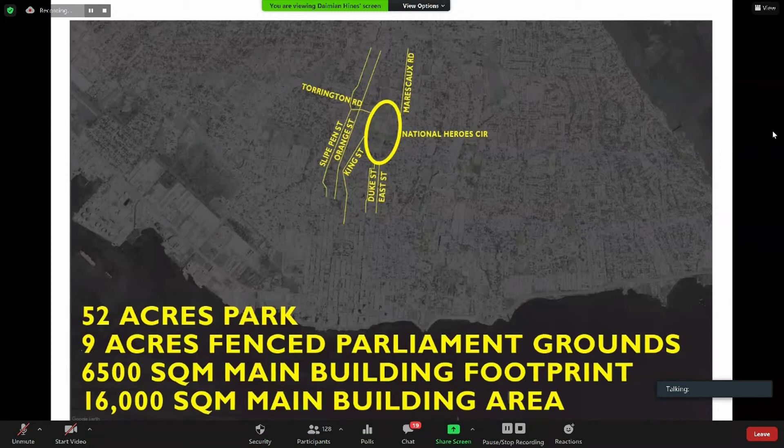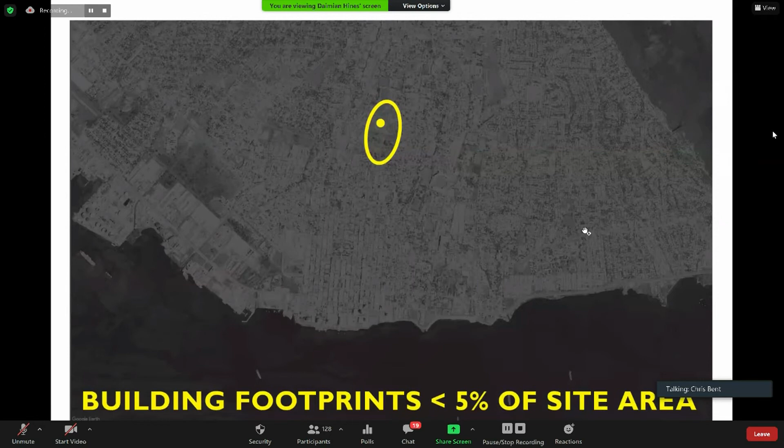If we could go to the next slide, Damien. And that's just to give you a graphic scale between the overall park, 52 acres, and the actual building, the Parliament building.

So as we said, it's about 85% open public park that we're creating. It's already there, we're not creating it, but we're going to enhance it, and we're going to try to demonstrate how we can make it even more accessible to the public than it is currently.

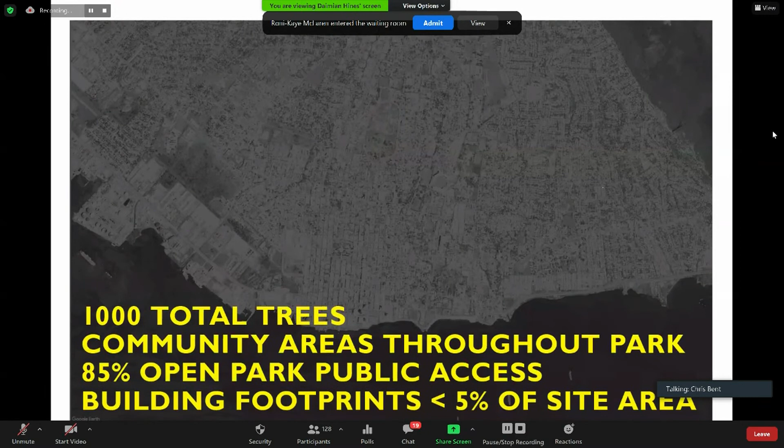Next slide, please. The overall, just to give you an idea of what it is that we're doing, and we'll go into it in more detail, is that we're looking at adding about 1,000 more trees to the site. We're going to be making sure that we use plants and trees that are readily available and endemic to Jamaica.

We're making sure that we are putting in a series of defined walkways and trails throughout the site, which will help to frame different activities throughout the park. We've looked at the improvement of infrastructure strategies around the park, how we manage water to irrigate the site, as well as how we're going to manage and control stormwater running off of the site.

We'll get into that in a bit more detail when Environmental Solutions presents the EIA. We're talking about a barrier-free park, which means it's not only open to anybody in the public, but it's also very accessible for anyone who has any form of disability, anywhere in that park. Anyone with any disability will be able to go and enjoy any area within the park.

We're adding a lot of amenities, and we're going to show you some of them, most of them, that we have in the park. But obviously there are some existing features in the park which we have respected, and we're going to enhance those. Areas like the shrine and the Patriot's Circle, we're going to make sure those are enshrined, properly addressed and detailed, and hopefully they will attract more public interest than currently exists.

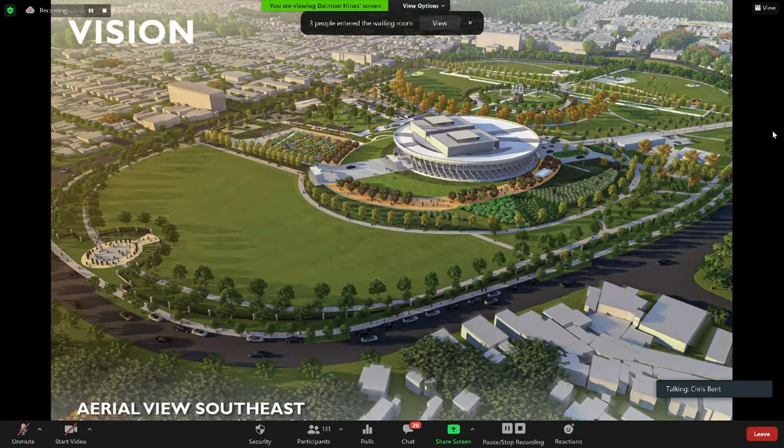So this is a quick overview of what Heroes Park is going to be transformed into. Just to give you your orientation, the area on the left-hand side of the screen is the northern end where Wolmer's Boys is, the entry to Wolmer's Boys. On the side where you have the word vision, that's where Allman Town is, and that building there that's been circled is the Ministry of Finance.

On the southern end, on the far end, that's where we come up Duke Street, and just to the left of that we have the Ministry of Education. The shrine area is right in the background there, where the existing shrine with all the heroes is, where all the heroes are buried. So that just gives you an overview of the orientation of the site.

So there are things that, when we first joined in the process of moving forward from the competition, we started off with having several public meetings and workshops. We've met with various stakeholders, local community, statutory authorities, various government groups, National Heritage Trust, security including the police, the JDF, and aviation authorities. We also met with environmental agencies, and we looked at the traffic study as well. So all of that fed into the solutions that we're showing you.

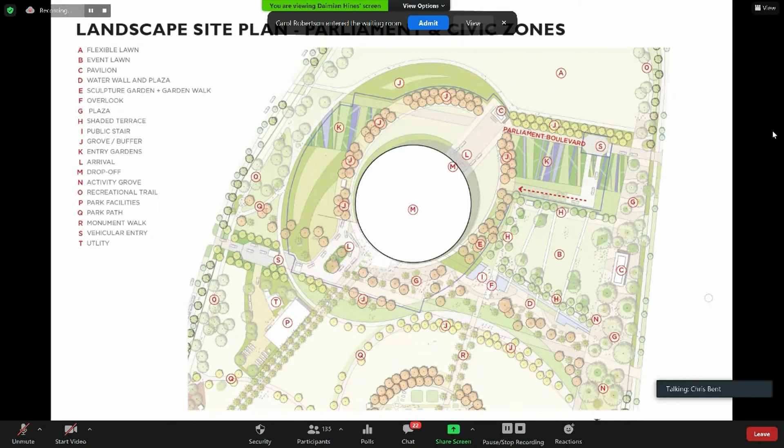So all of those things played into what we came up with in this design. We wanted to build on those concepts: the symbol of national pride, an icon of our people and our democracy, and most importantly, a place for people, the people's park. It's a place for everyone to use and enjoy, a place which truly represents not only the surrounding communities, but also all people of this nation. As our motto states, out of many, one people.

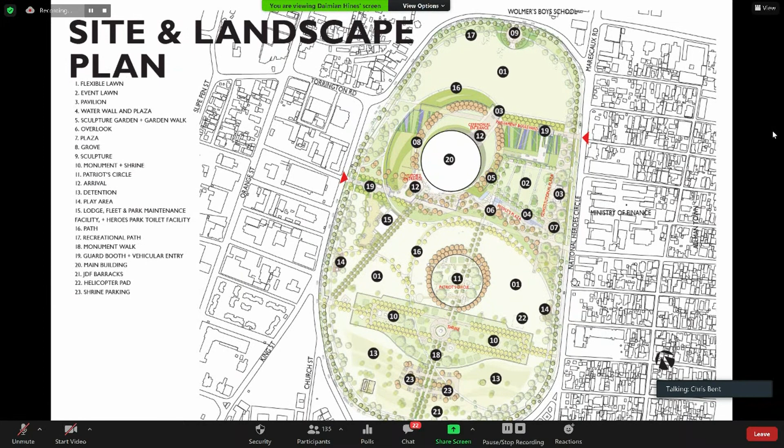The planning of the park was, as I mentioned, completely open and accessible. We looked at basically four or five different sections, starting off at the southern end. We have the existing shrine with all the heroes, and we enhanced that area for the kind of events and ceremonies that they have there.

When we were meeting with the JDF, who has overall care for this area, they were saying that a lot of locals didn't realize that this place is open to anyone at any time. It's an enclosed space, and they were encouraging us to try to open it up so that people could realize that you can go there and pay your respect at any time of the day or any time of the year.

So we took that into consideration. For the existing wall, we tried to create new openings, and tidied up some of the areas of the wall, which made it more visible to see into the shrine area.

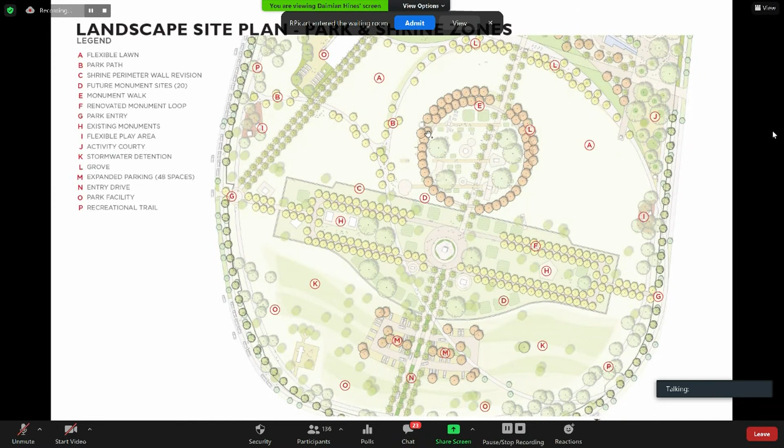And then adjacent to that, where you have what we call now the Patriot's Circle, where the former prime ministers, governor generals, and cultural icons are buried, we started to formalize that area a lot more to respect their contribution that they made.

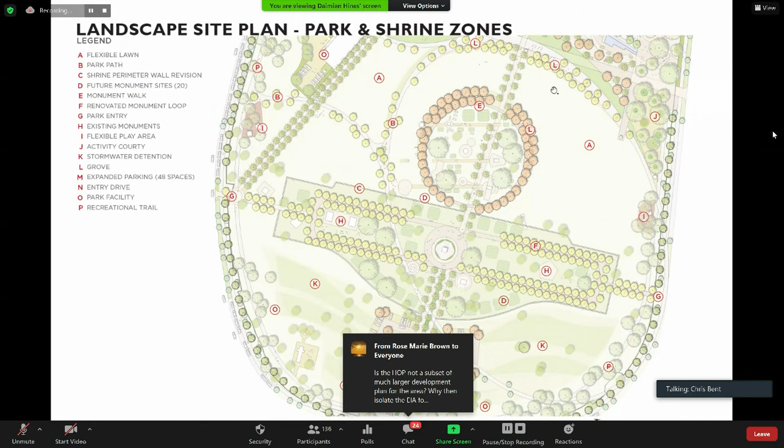At area B, just to the north of the water feature, we have what we call the Constitution Plaza, an area which terraces up from Marescaux Road up to the HOP building. That area will have a pavilion where you can have concerts, cultural events, meetings, or even a wedding if you want to. It's a lawn area which terraces up, and it can house about 10,000 people.

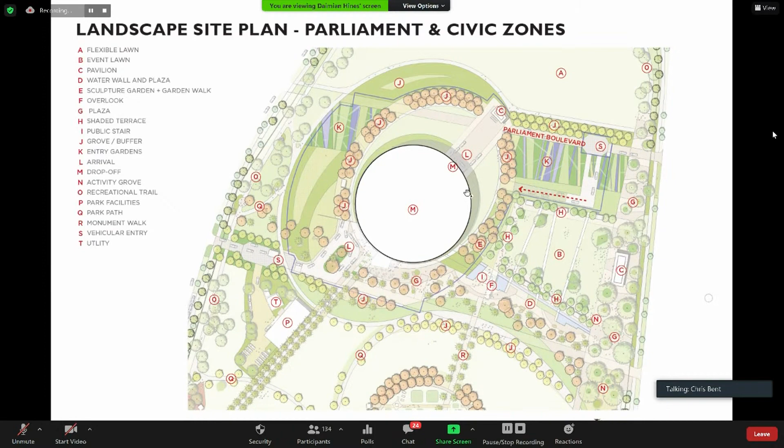The area we're showing now is the House of Parliament area, which would be fenced off for security reasons. We've reduced it from the original 11.4 acres down to about 7 acres of fenced off area. We made sure that we opened up the side areas from north to south so that we can have easy, unimpeded public access moving from north to south.

At the northern end, we have an open field, and at the very top of that area, closest to Wolmer's, we have what we call our Out of Many One People monument, which will have a series of statues looking inwards to show the diversity of our population. Out of many, one people. We all are one people. We may look a little different, but we're all Jamaican.

What we also looked at is the various entrances onto the site. We've more or less kept all of the entrances, though we've had to shift them a little bit to make sure it's aligned with our plan. But pretty much we have 8 entrances onto the site, which are all public entrances.

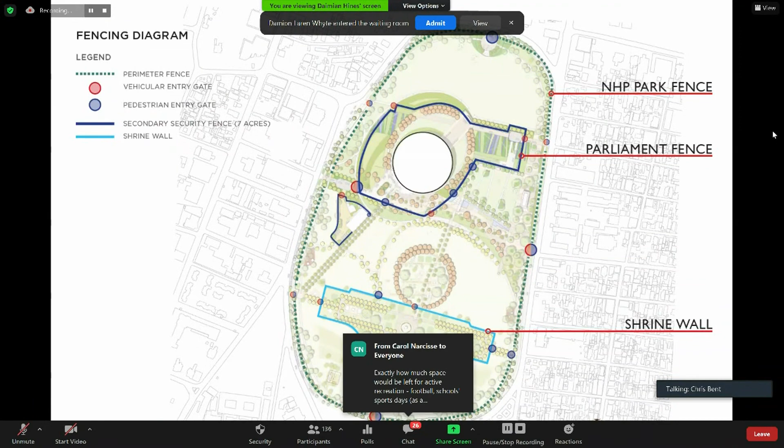That just gives you another breakdown of all the public spaces we have. We have open spaces scattered throughout at the north, and down on the east and west of the site, with open fields and lawn areas that can be used for multiple reasons, whether football, cricket, or flying kites. Those areas indicated in brown are play areas for younger children. It's all about the family coming together, using this space, enjoying the facilities.

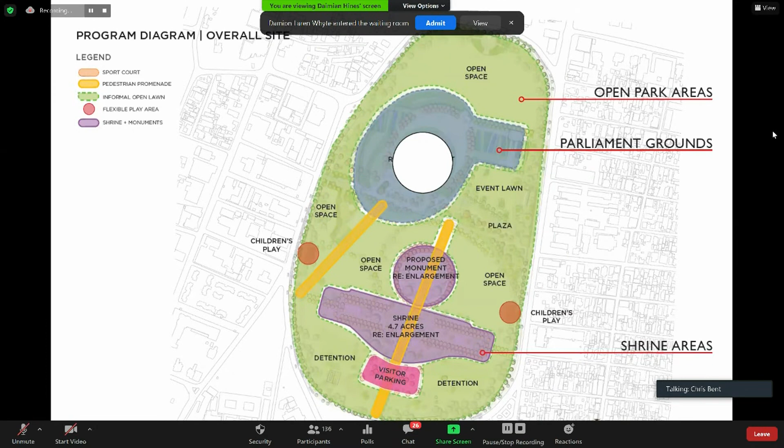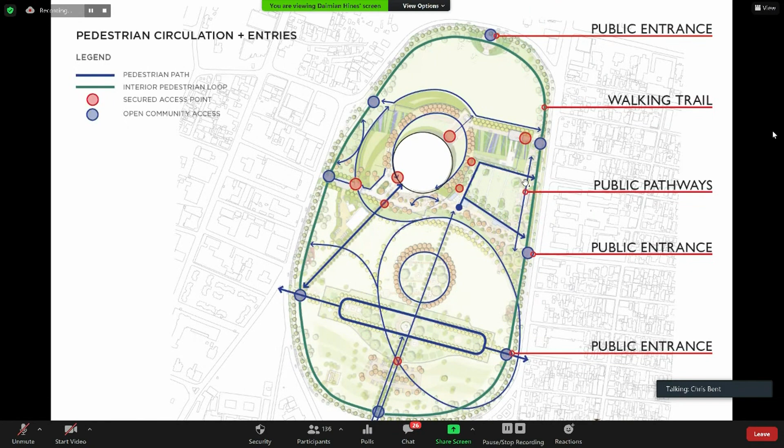This is a confusing drawing, but a very useful one, because we've outlined the pathways created throughout the park, each one connecting to all of the main areas of activity. Along these pathways, we'll also have the opportunity for various sculptures depicting our culture and heritage, each one representing one of the 14 parishes throughout the island. That's not going to be built into the project right away, but we've identified all the areas so that over the years we can build on that and get different artists to participate in honoring those.

If you could just go back, just to identify that, that's what we're talking about, that water feature there on the right, which will be that area off of the People's Plaza.

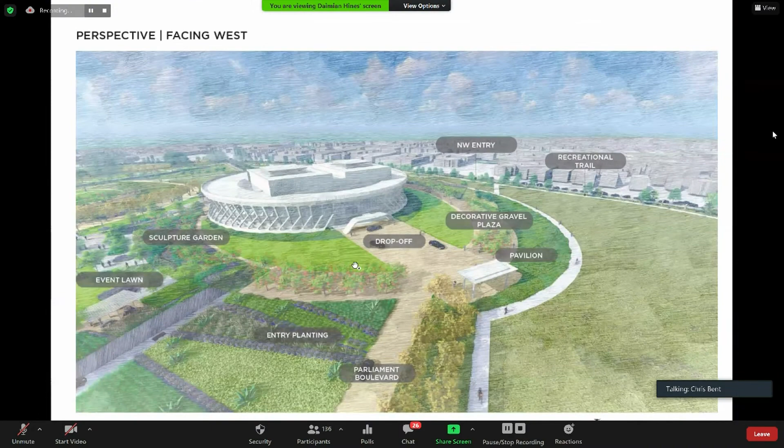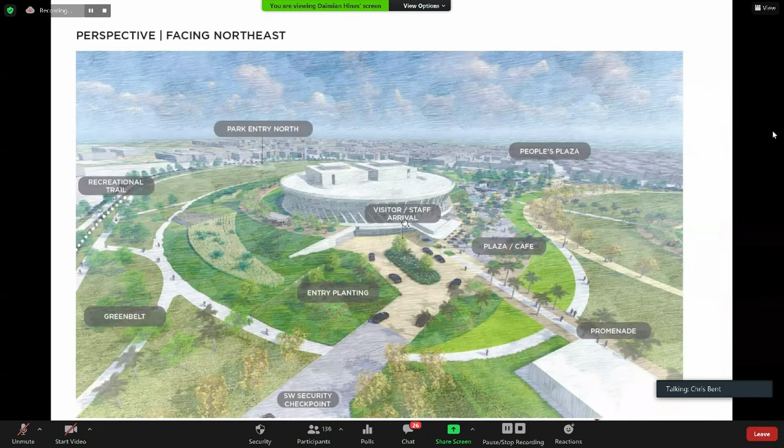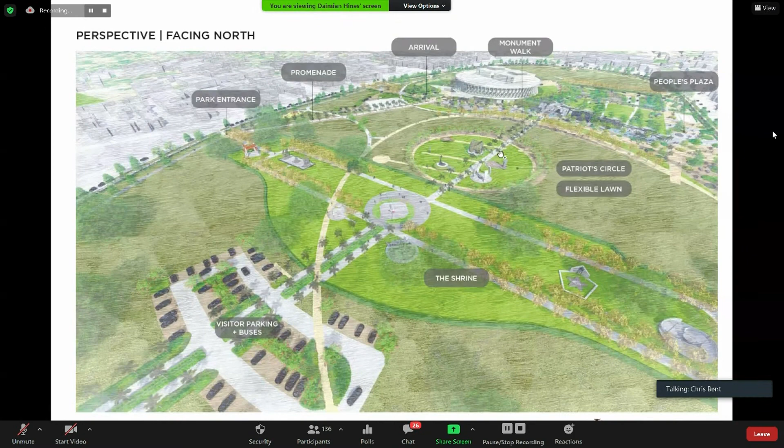And if we go to the next, these are just some images of the landscaping at different angles. This is the main entry, the public entry to the park on the southern end of the site, where because of the height difference, we've separated the public entry and the public and staff entry from the ceremonial entry. This is the shrine area looking towards the building to the north, with the Patriot's Circle in between, and again you can see the outline of the water wall, the water feature, looking northwards.

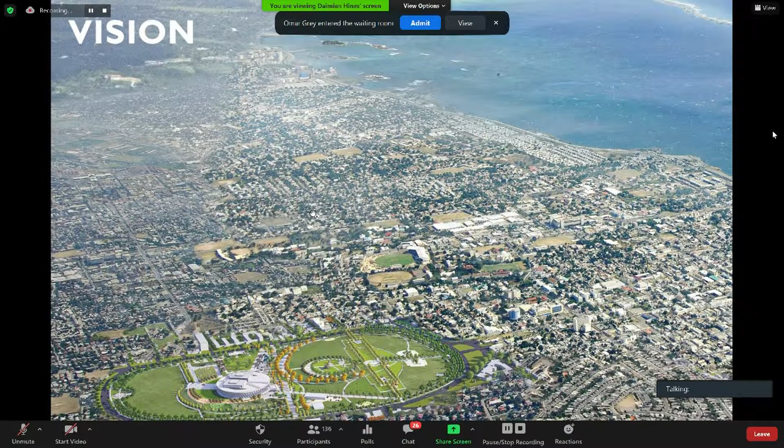And when it comes to the building, the site and building are intended to work together. The principles for the building are to inspire, to promote governance, reverence for our traditions, and to implement our laws.

With that, it is to be noted that the building design, a circular form, is intended not to have a front, a back, or a side. Our position is that the building should present its face to the community, and no one side has more privilege than the other.

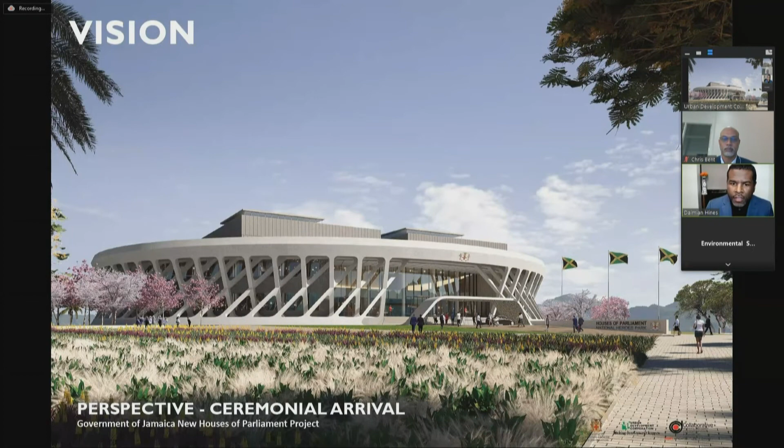The circular building is organized with a central corridor, which we call a spine, a crossroad, and a ring road, to ensure good circulation throughout the building.

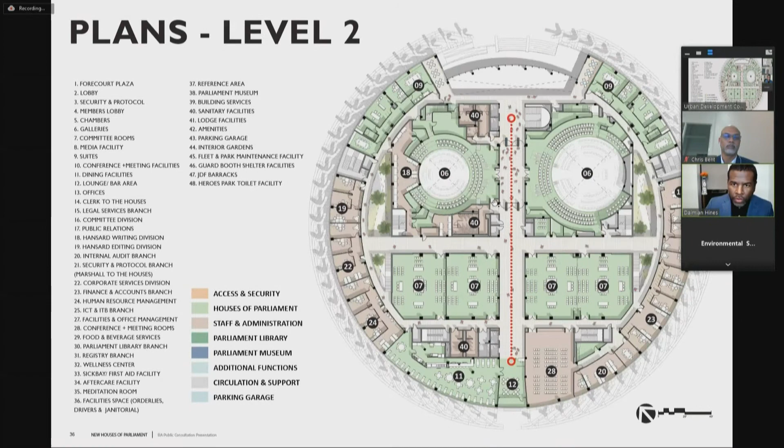At level 2, in green again, is the Senate and the House of Representatives. These are the galleries for the public at level 2, looking down into the debate chamber floors. Same as level 1, support offices and administrative offices in brown surround the parliament rooms.

What we've also done to ensure this is a state-of-the-art space is introduce two interior gardens, where natural light from skylights is introduced to promote a better internal environment.

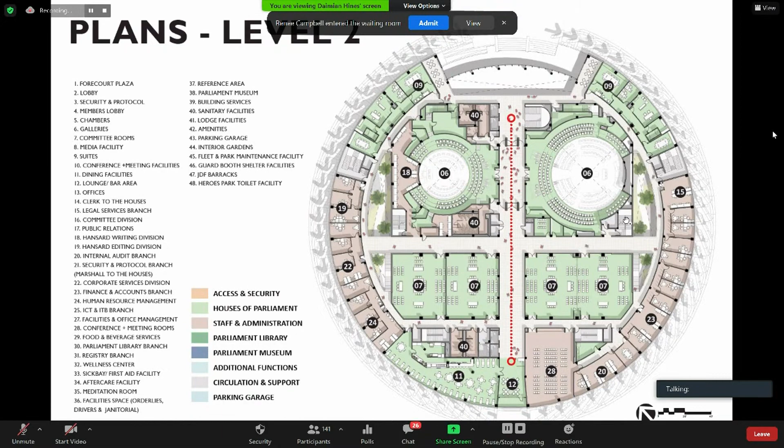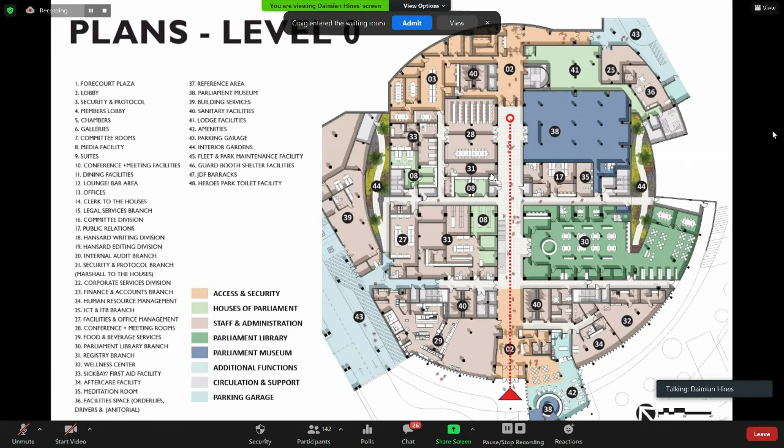What you may have noticed in the site plan is that you will not see large parking lots at surface. All you see is a green park. As Chris mentioned, 85% of the park is open space, lawn space, green space, program space. You do not see large parking structures or parking lots.

All of those parking spaces, indicated here in blue, are below a green roof. Again, as mentioned, the intent is for the park to remain as public and as green as possible.

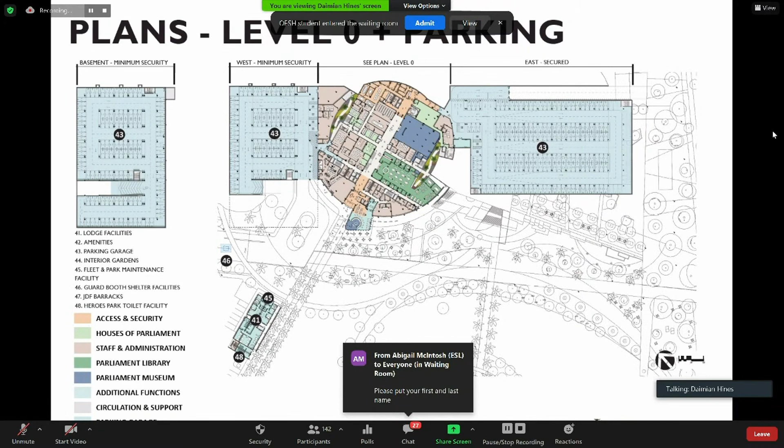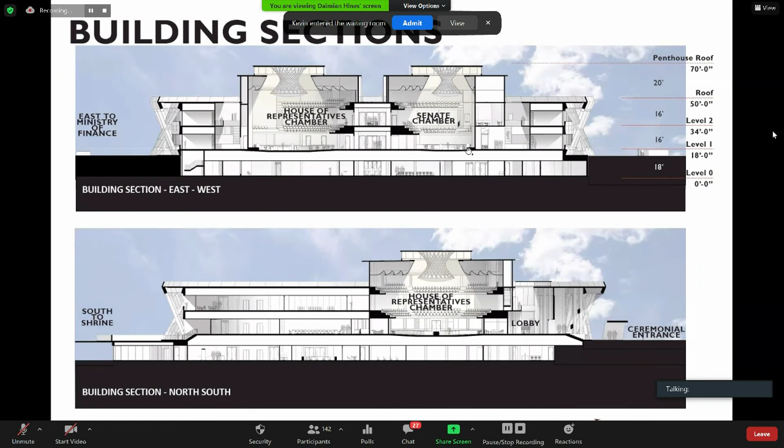Quickly, these are sections showing how the spaces are organized. You have the multi-floor House of Representatives chamber. You have the Senate, which is a smaller version of the House of Representatives debate chamber.

With that, we would like to thank you. We understand this is where the work starts with the balance of the presentation. Thank you for your time, and we will be glad to answer any questions in regard to the site.

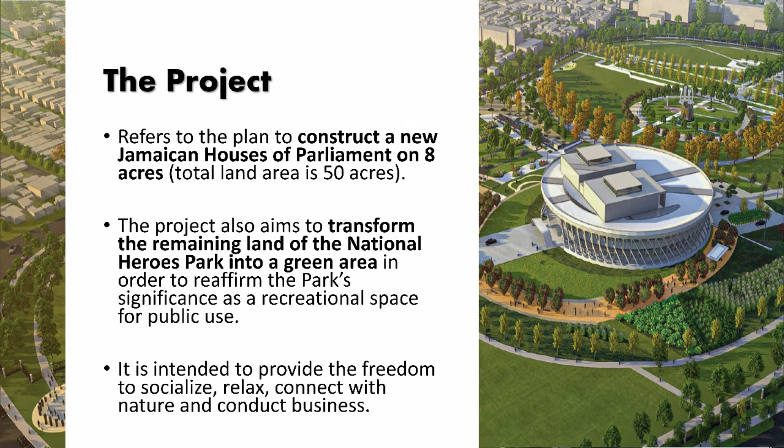We have heard a bit about the project already, so briefly, we're referring to the plan to construct this new Jamaican Houses of Parliament. It's on about 8 acres of land. The project is intended to transform the remaining land of the National Heroes Park into a green area, so as to reaffirm the park's significance as a recreational space for the public. The intention is that it will provide the freedom to socialize, relax, connect with nature, and conduct business.

As many of us know already where the National Heroes Park is, the project is going to be located within the boundaries of the park. This park is already bound by a number of government buildings, as well as 5 main communities, including Crossroads to the north, Allman Town to the east, Fletcher's Land to the south, and Hannah Town and Jones Town to the west.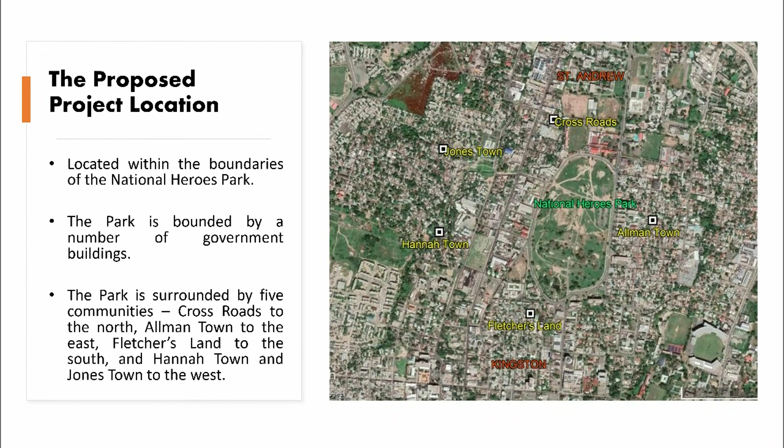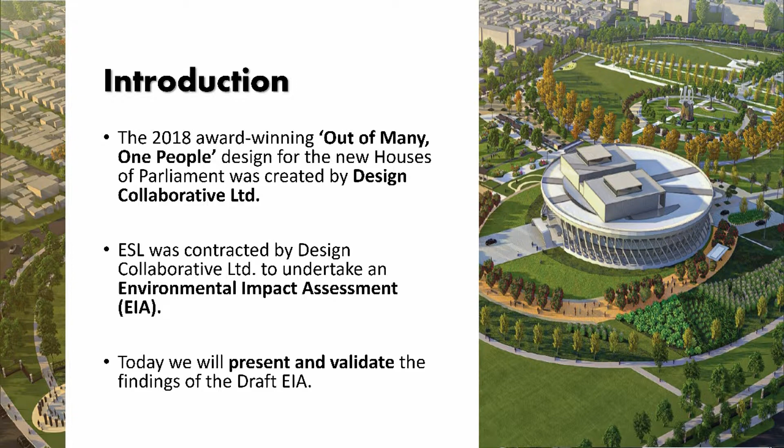The project came about after the Design Collaborative Limited team was awarded a competition; the design is called Out of Many, One People. Environmental Solutions Limited was contracted by Design Collaborative Limited, and today we're presenting the findings and getting validation on the draft Environmental Impact Assessment Report.

The purpose of the EIA is to provide an overview of the proposed project, as well as the physical and environmental setting in which the project is located. It is also intended to identify potential environmental and social impacts and risks of the proposed project, as well as to suggest recommended mitigation measures.

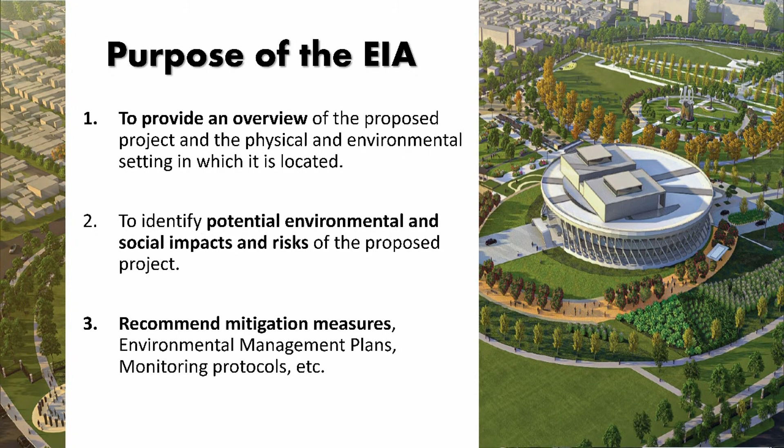For many years, George William Gordon House has served as the location for the Government of Jamaica Houses of Parliament. But as far back as the 1950s, the government had realized there was a need for larger space, and there was a vision at that time to develop a concept of a government campus at the park, where the Houses of Parliament would be located along with the head offices of the various government ministries surrounding.

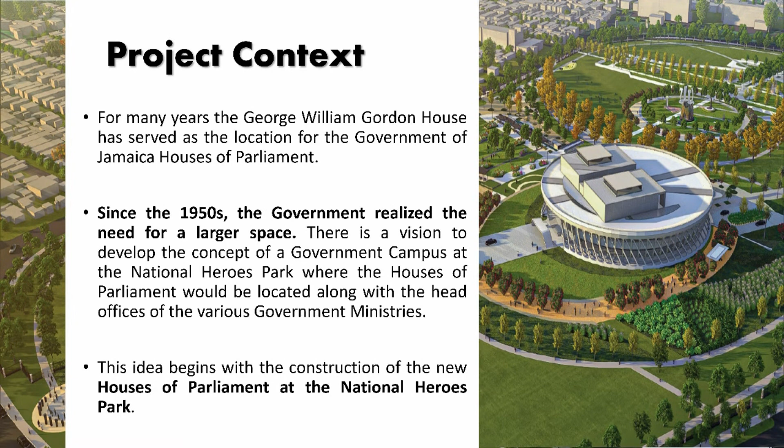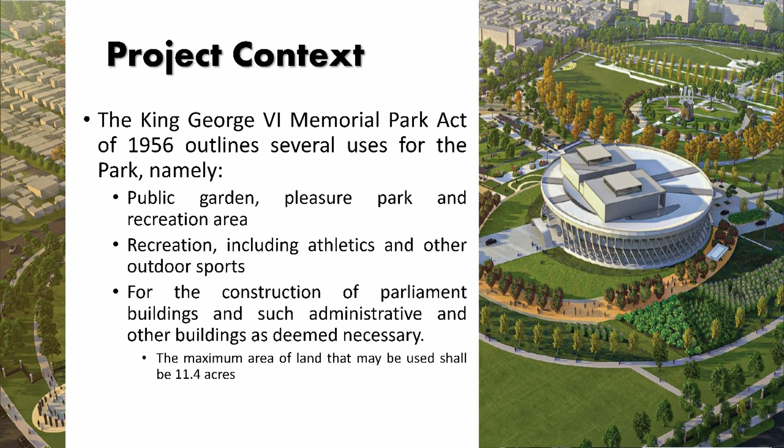The idea of the government campus begins with the construction of the new Houses of Parliament at the National Heroes Park. The King George VI Memorial Park Act of 1956 actually outlines what the park can be used for, namely public garden, pleasure park, and recreational area, and for the construction of parliament buildings and any other administrative buildings. It also indicates that only a maximum of 11.4 acres can be used, and as you can see from the earlier presentation, the project encompasses all of these things.

Briefly, our approach to conducting the environmental impact assessment included background research and data collection. We did field assessments, including the physical and ecological, looking at heritage and the socioeconomic environment. Following this, the data was analyzed to determine potential impacts, both positive and negative, and we identified or suggested feasible mitigation measures where necessary.

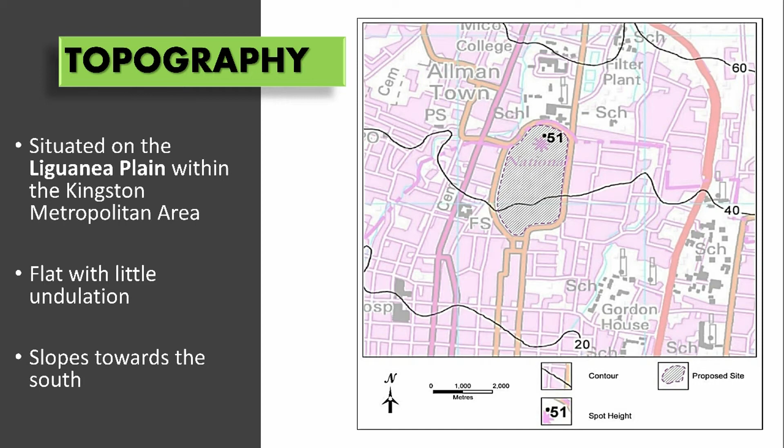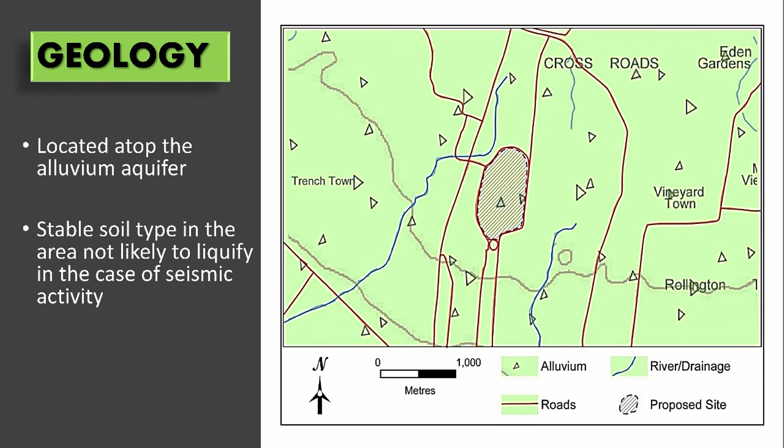I'm going to provide a brief overview of the existing environment, looking at the physical, ecological, heritage, and socioeconomic environment. The site is located on the Liguanea Plain, within the Kingston metropolitan area. It's generally flat and slopes towards the south. It is located atop the alluvial aquifer, and the soil is generally stable and not likely to liquefy in case of seismic activity.

It is also located in the Hope River Watershed Management Unit, in the McGregor Gully Sub-Basin, and the drainage passes through the site through a concrete culvert into the Barnes Gully to the south.

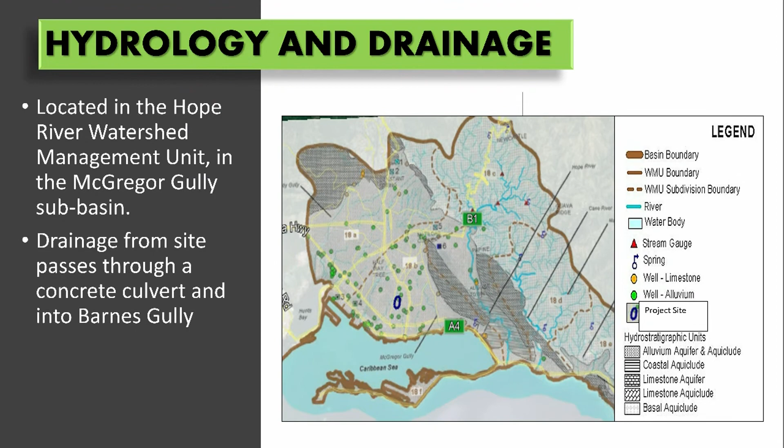Briefly on the climate and natural hazards, the climate of the area is generally consistent with what is experienced by the rest of the Kingston and St. Andrew area, which has a tropical maritime climate, bimodal rainfall with peaks in May and October, and like the rest of Jamaica, it is susceptible to tropical cyclones and earthquakes.

There is a well on site; however, the results indicated high levels of fecal coliform and nitrate levels. Air quality samples were taken from about 8 locations within and around the site, and all had concentrations less than the standard of 150 micrograms per cubic meter of air.

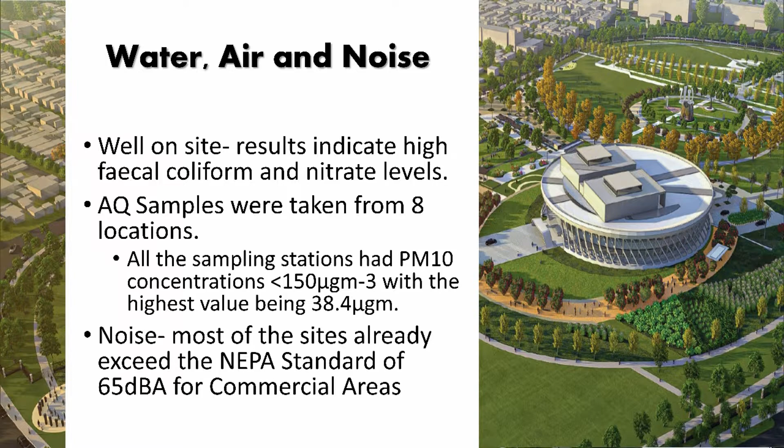The same 8 sites had noise samples taken, and most of the sites already exceed the NEPA standard of 65 decibels for commercial areas. Examining the ecology of the site, you can see some images here.

The site is not considered to be ecologically sensitive. It has a history of disturbance related to significant vegetation clearance and landscaping as part of the different uses of the park. It is currently 90% dominated by grasslands and/or scrub, with a few trees and shrubs. There were no species of special conservation status—no endemic, threatened, or protected species—observed at the time of our assessment. This is a graphical representation showing it is largely grassland with low tree density.

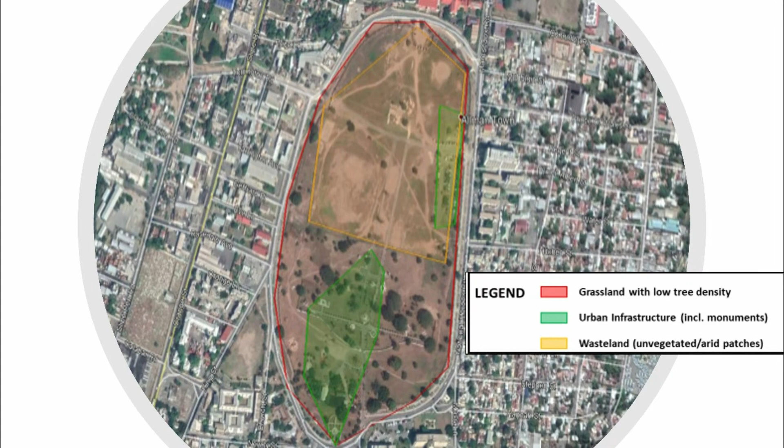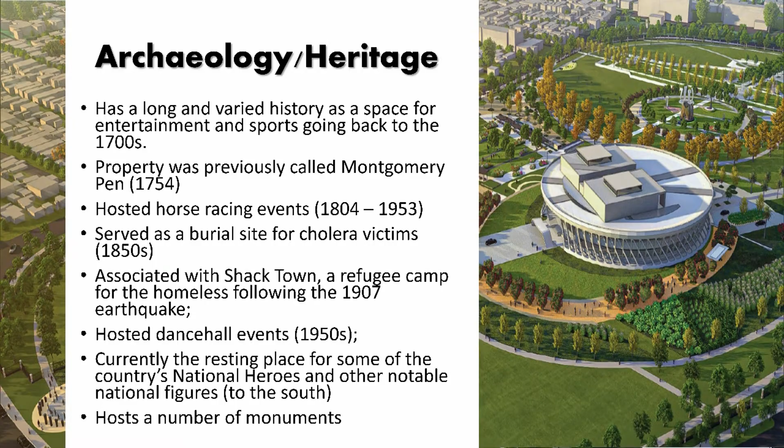The site itself has a long and varied history, going as far back as the 1700s for entertainment and sports. In 1754, the property was called Montgomery Pen. I couldn't list everything on screen, so this is just a brief list of some uses of the site. From 1804 to about 1953, the site hosted horse racing events. In the 1850s, it served as a burial site for cholera victims. In 1907, it was a refugee camp as a result of the earthquake. It hosted dance hall events in the 1950s, and currently it is a resting place for the country's national heroes and other national figures.

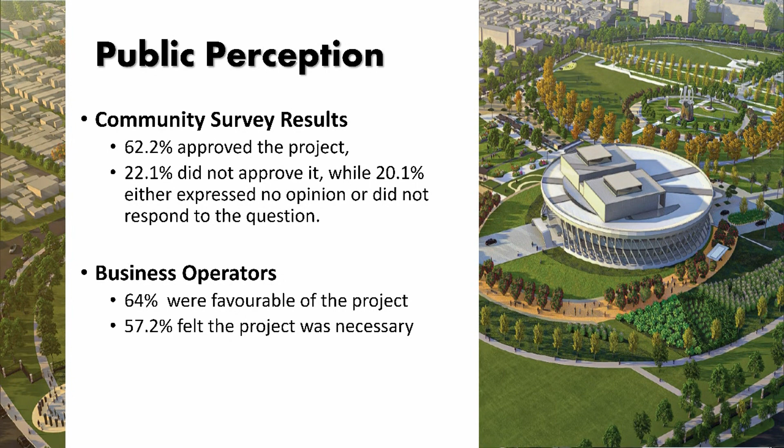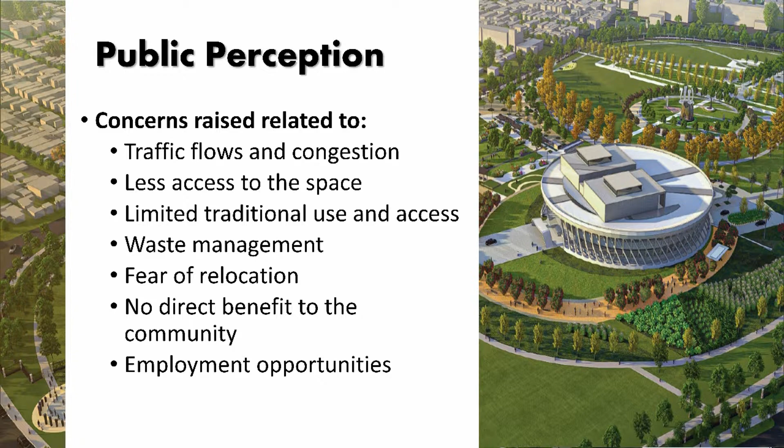Concerns were raised about the traffic the project could potentially generate, concerns about access to the space, waste management, fear of relocation, and employment opportunities. We asked the groups for suggestions on what this space could be used for. Most persons expressed something like an Emancipation Park or green space—they wanted that green space. Some suggested a technical vocational center, and very few suggested housing, sports, or a fire station complex.

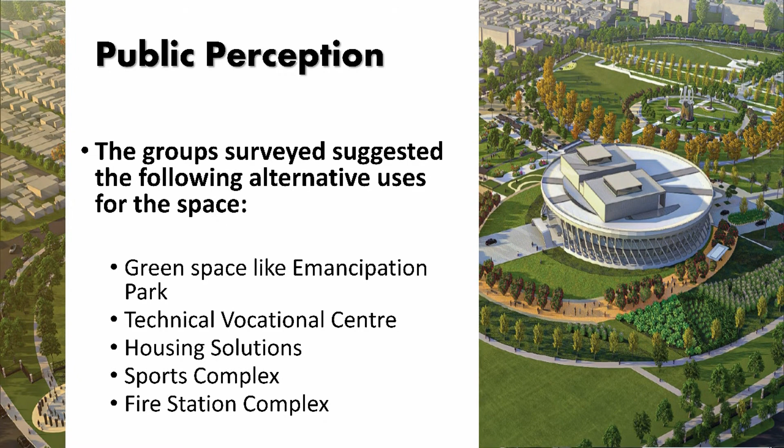We examined the project and identified potential impacts and proposed mitigation measures for the construction and operation phases, and also looked at the cumulative impacts of the project. I'm going to briefly go through some potential construction impacts identified and the mitigation measures—please note that the impacts are not always negative; both positive and negative impacts have been identified.

In the construction phase, regarding hydrology and drainage, there is anticipation that clearance of the site could lead to increased sediment runoff and increased runoff during land preparation. However, we have proposed several mitigation measures—to highlight a few: contractors should install silt traps, cover materials, clear the land in stages rather than fully, and contour the site during clearance to allow for infiltration prior to replanting.

It's also important to note that while coming up with these mitigation measures, it was a very informative approach to doing this project. We worked very closely with the design team, so they have already taken some of these mitigation measures on board into their design where possible.

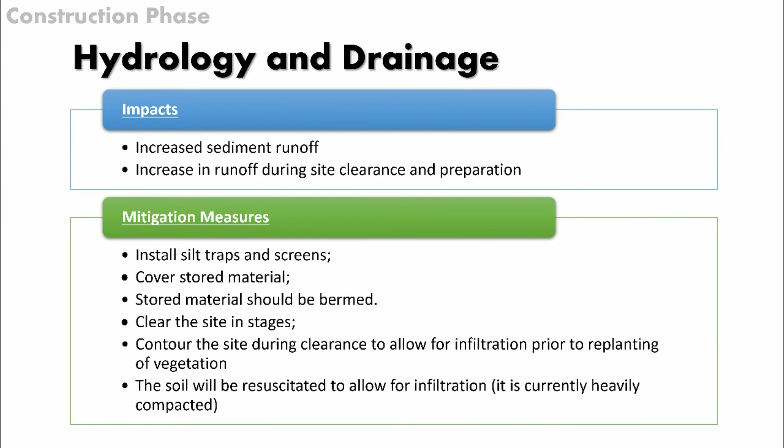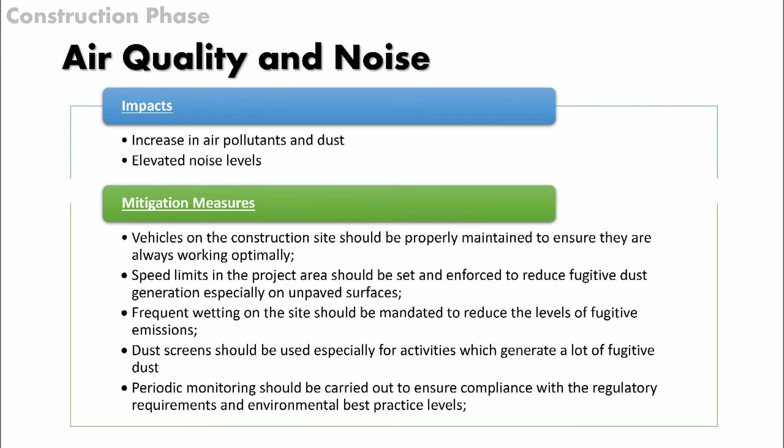Regarding air quality impacts, there is potential for an increase in air pollutants, dust, and elevated noise levels due to increased construction vehicles. It is suggested that construction vehicles be properly maintained so they work optimally, speed limits be enforced to reduce fugitive dust for health and safety, the site be frequently watered, and where possible dust screens be used. Periodic monitoring will be required, with reports submitted to the National Environment and Planning Agency. Any transported material should be covered and properly stored, and all persons are required to wear appropriate personal protective gear.

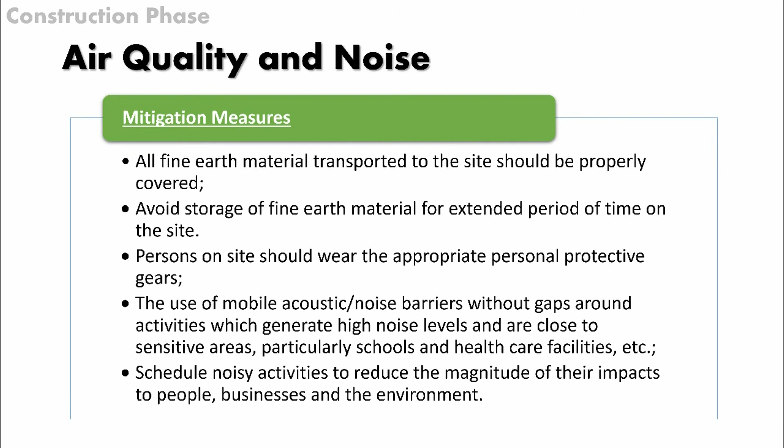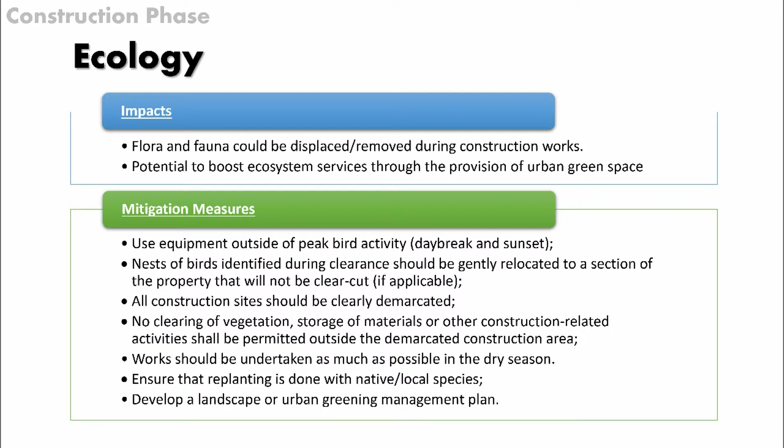From an ecological perspective, while the site is not considered ecologically sensitive, whatever flora and fauna are present are likely to be displaced, requiring mitigation measures. However, there's also a positive side—the project is intended to boost ecosystem services through the provision of urban green space. Some mitigation measures relate to how work is undertaken: not working during peak bird activity times, clearing the site in stages rather than in full, and ensuring contractors develop a landscape or urban greening management plan.

It is 70% of the trees or plants to be replanted that are going to be native to Jamaica, and the remainder are supposed to be adapted to the region. We have proposed that local species be used as much as possible, and this is to indicate that the designers have already taken this into consideration.

From a social aspect, there's likely to be an increase in traffic and increased social apprehension and tensions, including anxiety, anger, and potential for increase in crime. We have suggested that a traffic management plan be prepared. This has been done, and therefore it needs to be implemented. As much as possible, where possible, persons within the community should be employed, and the project executing agency should have open and frequent communication with the community throughout the construction process.

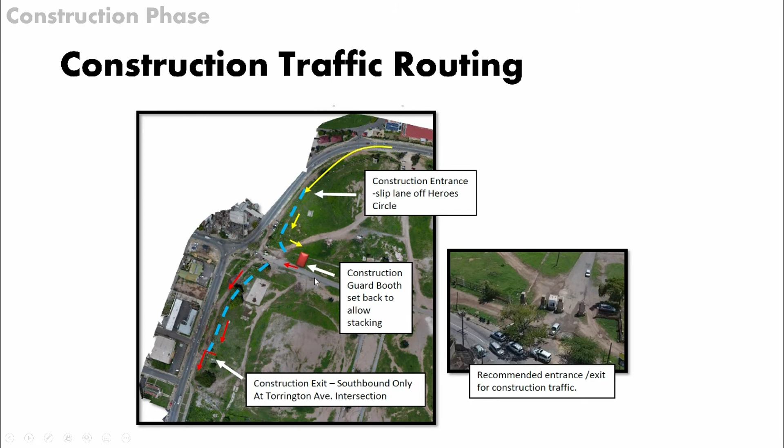This image shows some of the proposed traffic construction routing. Rather than causing backup, there will be indenting or creating a slip lane to allow construction vehicles to enter so as not to cause any traffic backup. You'll see there is a construction entrance here off Heroes Circle, and there will be a guard booth constructed and set back to allow for less stacking up of vehicles.

There is a positive from the economic side - during construction, there's likely to be improved or increased employment and economic opportunities. As much as possible, if there's any possibility for local persons to be employed, they should be announced as early as possible so as to reduce any anxiety or concerns.

During construction, there may be a potential to uncover items of significant cultural heritage, and there might be damage to items of significant cultural heritage - unlikely but possible. Therefore a watching brief has been suggested to be prepared, cataloging how the construction process should take place near any artifacts or anything of significant cultural heritage value. JNHT would be present on site along with a team of archaeologists to ensure they're on standby during any particular location where there might be excavation or land clearance.

When we look at the operation phase of the project, we also had to identify if there were any possible impacts and suggest any mitigation measures.

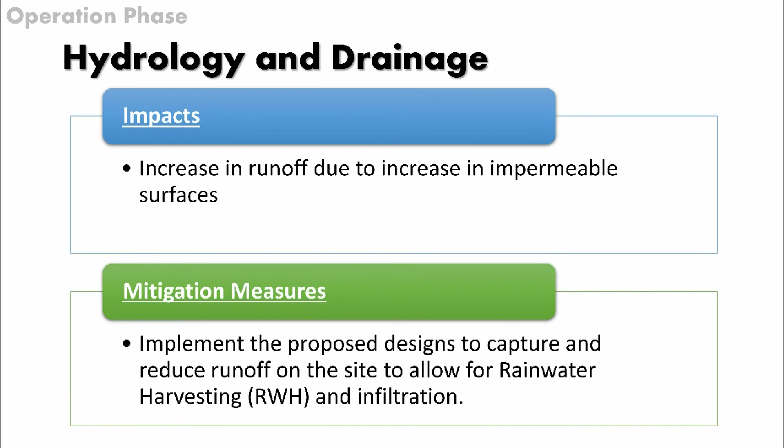Because there is likely to be an increase in impermeable surfaces, there will be an increase in runoff. However, as much as possible, the design is to capture the rainwater and allow for infiltration. This was communicated with the designers, and as much as possible, they have taken this into consideration. You can see that the design has allowed for detention areas, which will reduce any potential runoff that could overwhelm the Barnes Gully.

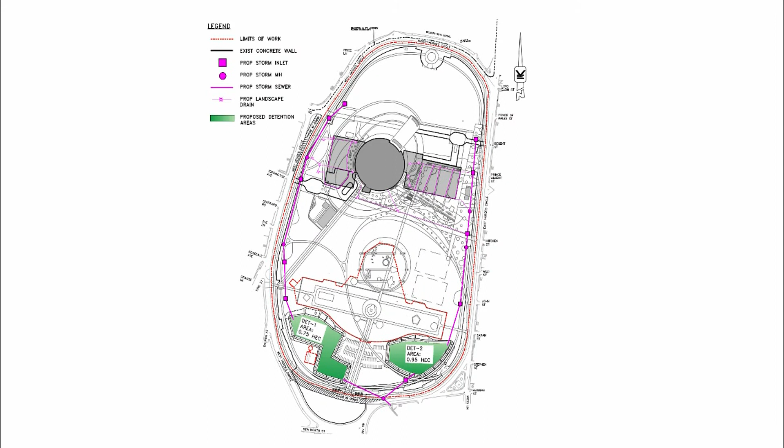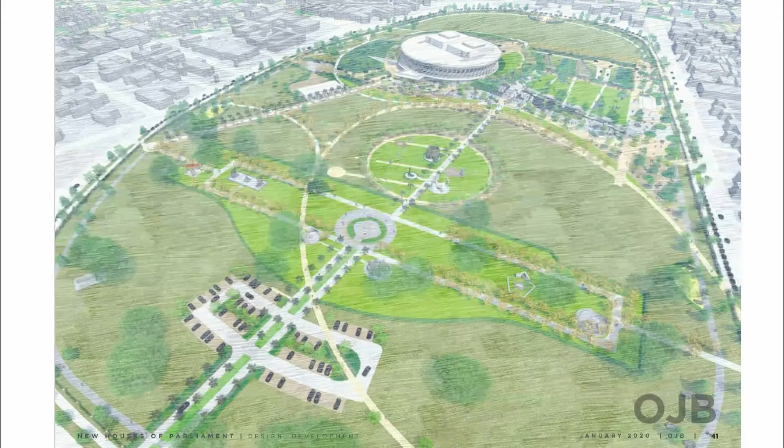From an ecological perspective, the positive impact is there will be an increase in green area within the project area, and as much as possible local species have been suggested to be used. As I indicated before, 70% of the plants to be used are going to be local. This image demonstrates a lot of green space, much more than what is presently there. These are just a few of the species being considered, and there is actually a nursery that has been started to the south of the property with about 1,000 species.

From a social aspect, there is likely to be an increase in the volume of cars in the area because it will be attracting more people. There will be an increase in visitors to the park, hopefully not just for recreational purposes, but also to view the heritage features. As much as possible, we are suggesting traffic signals be used to control the flow of traffic. A traffic management plan will have to be prepared, utilizing signals or signs throughout the property to educate persons as to the history of the site.

As indicated, the impacts are largely positive. There will be play zones, recreational areas, and entertainment zones. Chris indicated that about 10,000 persons could have a function in one location. There is a potential for the National Heroes Park to become a catalyst in the development of both the economic and physical landscape of a future Kingston.

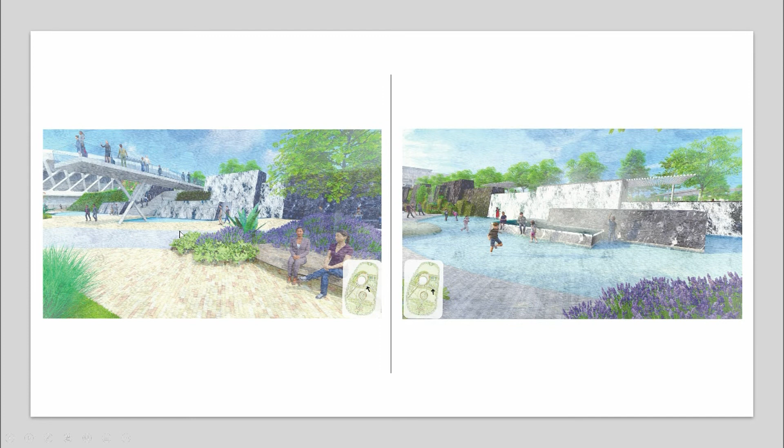These are just a few images - I think Chris mentioned this is a water feature, and you'll see that it really encourages persons to come and relax and enjoy the space.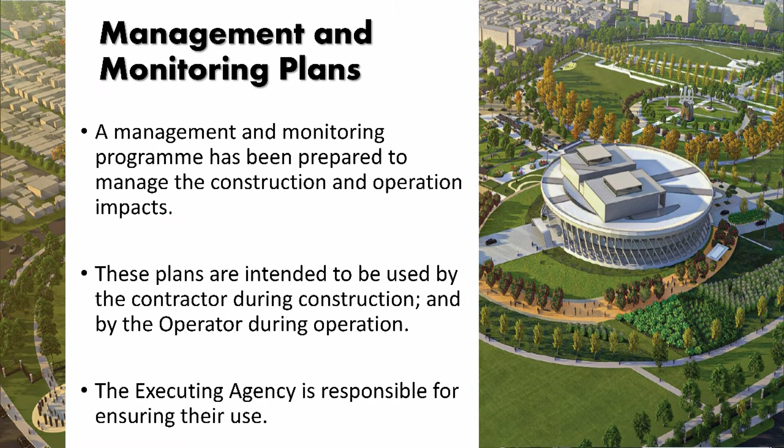Following the impact assessment, we had to prepare management and monitoring plans, which take into consideration the proposed impacts and the mitigation measures. A management and monitoring program is important to manage the construction and operation impacts. They are intended to be used by the contractor during construction and by the operator during operation, and the executing agency will be responsible for ensuring that they are actually used.

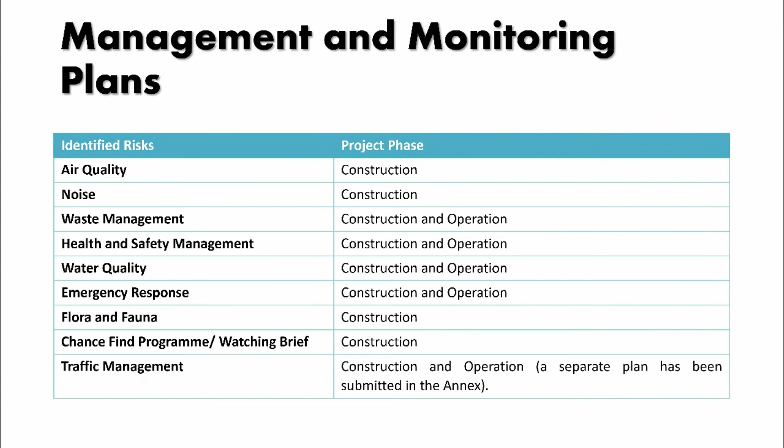We prepared management plans and monitoring plans for the major risks that were identified, and these related to air quality, noise, waste management, health and safety, water quality, emergency response, flora and fauna, the chance find program or watching brief which I mentioned, and traffic management. These have all been prepared and submitted to the agency.

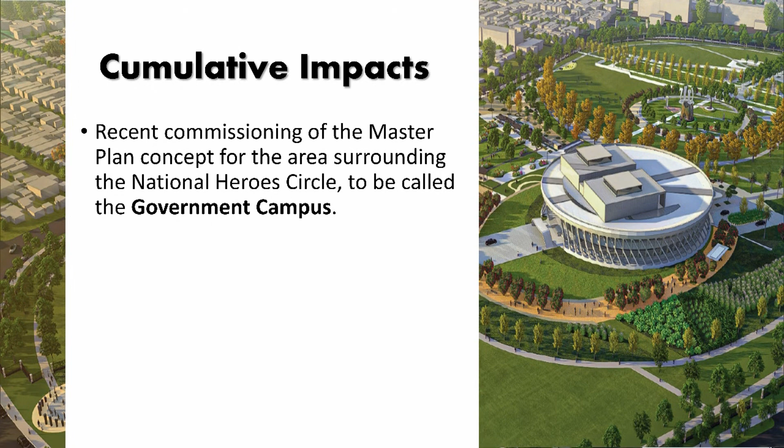From a cumulative point of view, we spoke about the government campus, and there has been a recent commissioning of a master plan concept for the area which surrounds the National Heroes Circle, supposed to be called the Government Campus. Now, with this project, along with the new Jamaica Houses of Parliament, there is likely to be an increase in traffic, increased demand for parking, greater water demand and usage because you have more buildings and more persons, greater sewage production and solid waste generation, greater noise, and greater impermeable spaces.

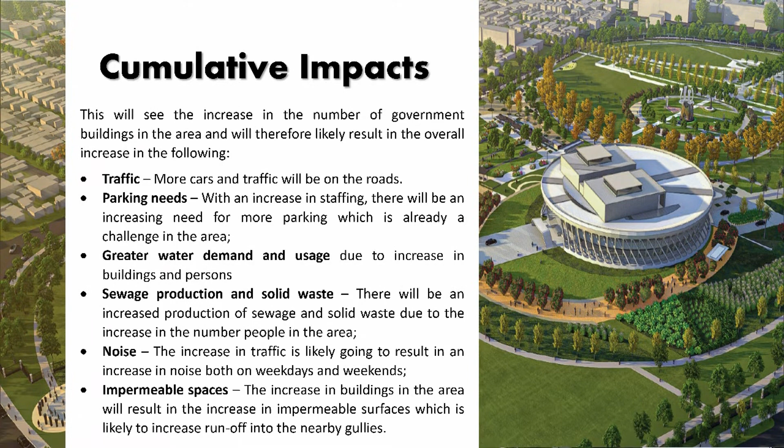And therefore, when we get to that point, it is important that these are considered and as much as possible taken into consideration in the designs.

We are also required to look at any possible alternative uses for the space. The first alternative is that you take no action, meaning the proposed project site remains as is without any development. This eliminates the added value and upliftment it would bring to the surrounding communities. There would be no additional job creation, and the Houses of Parliament would remain at Gordon House on Duke Street, where the space would continue to remain a problem.

The other option would be to have a public garden or a pleasure park or recreational area, which is all in line with the Act and the prescribed uses of the space, and it would not have a Houses of Parliament building on it. The EFJ had actually proposed this some years ago, and that would be the alternative.

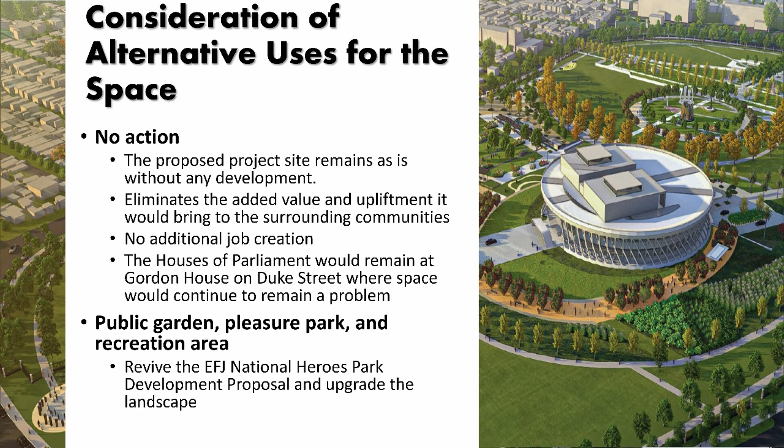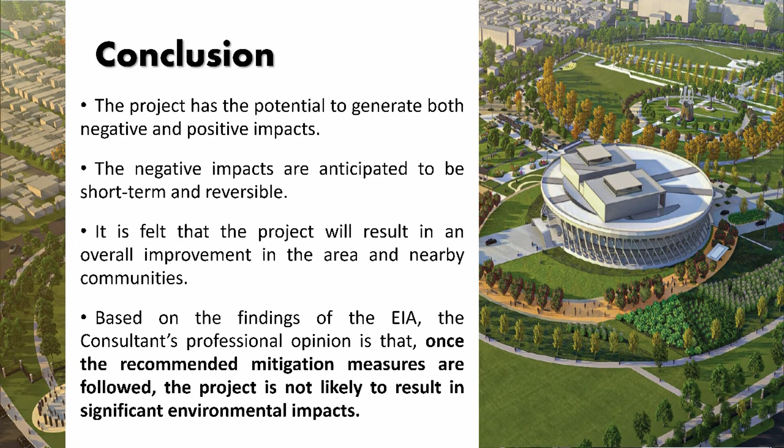In conclusion, the project we have identified has the potential to generate both negative and positive impacts. However, the negative impacts are anticipated to be short-term and reversible, and it is felt that the project overall will result in an overall improvement in the area and nearby communities. Based on the findings of the environmental impact assessment, it is our professional opinion that once the recommended mitigation measures are followed and implemented, the project is not likely to result in significant environmental impacts.

However, with the future development plans for the general area, it is important that consideration be given to improving the water supply, the sewage and general solid waste management of the area, as well as the use of permeable parking spaces, rooftop green spaces, rainwater harvesting, and solar energy. These are all highly recommended for future considerations in the development of the area, as well as traffic management, and how that is implemented is also important for consideration. I thank you.